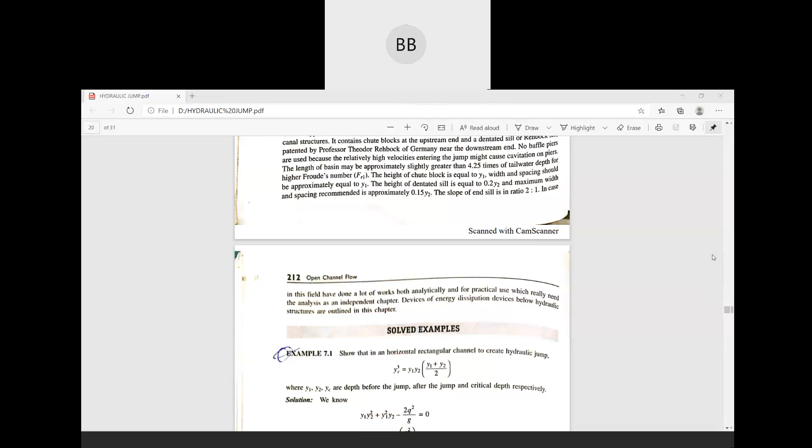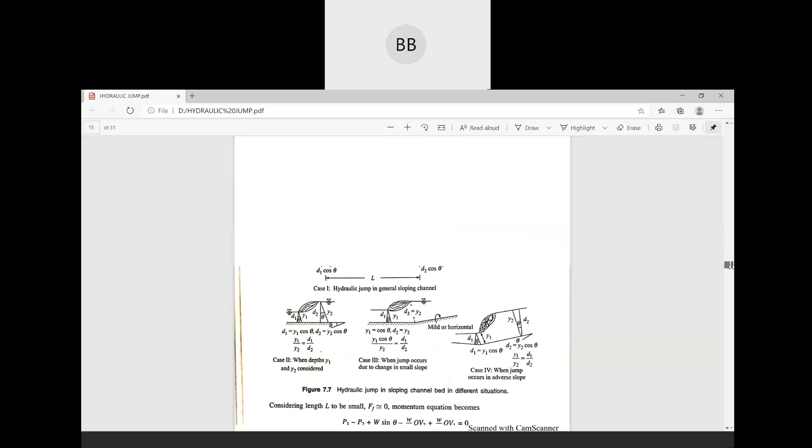I think in the last class we discussed types of jump, right? That is over. Then I think we also discussed losses of energy, and length of the jump.

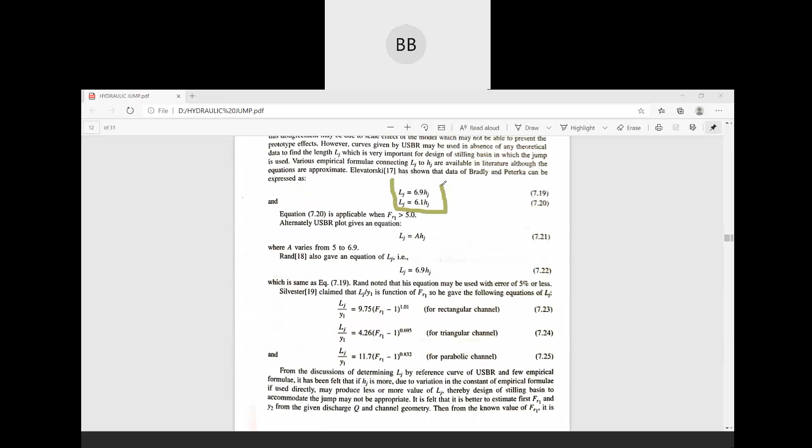We have two equations. When your Fr1 is greater than 5, your length of jump will be 6.1 times of hj, that is the height of the jump. And height of the jump is nothing but y2 minus y1.

If it is less than 5, then we will go for 6.9 hj, that is 6.9 times of the height of the jump.

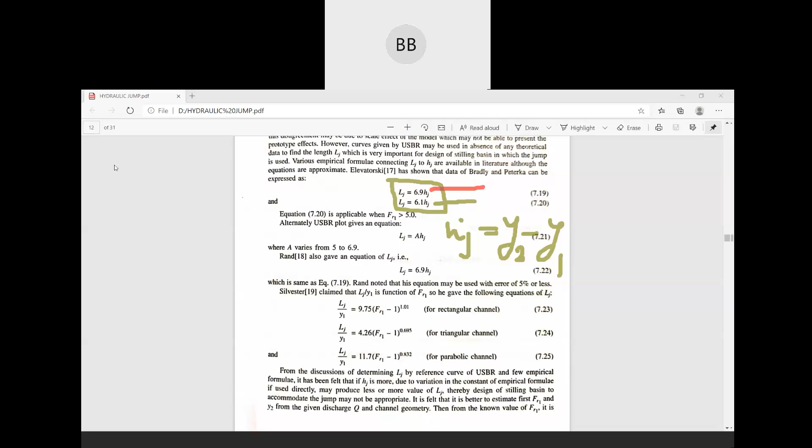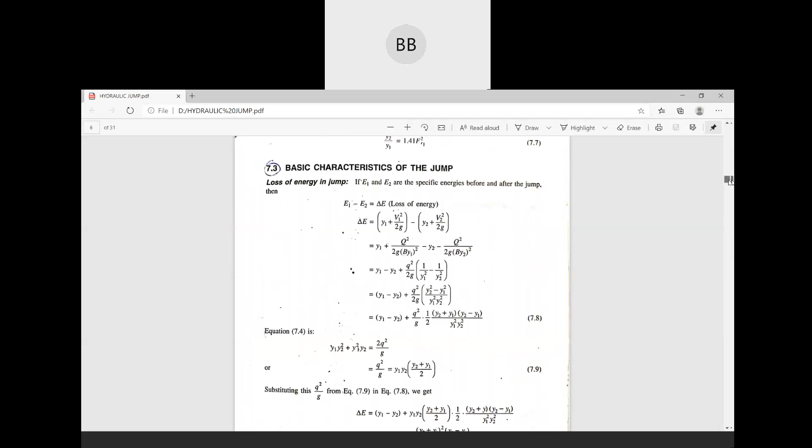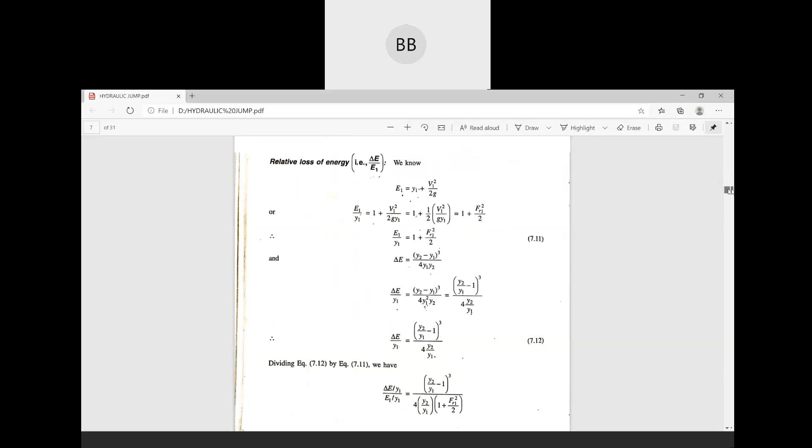Next, loss of energy, I think we have already discussed. This is the equation for loss of energy. I think we have already derived this expression, right? This is the loss of energy equation, that is nothing but y2 minus y1 whole cube divided by 4 y1 y2.

Then we have efficiency of the jump. Efficiency is nothing but E2 divided by E1. That is your efficiency of the jump.

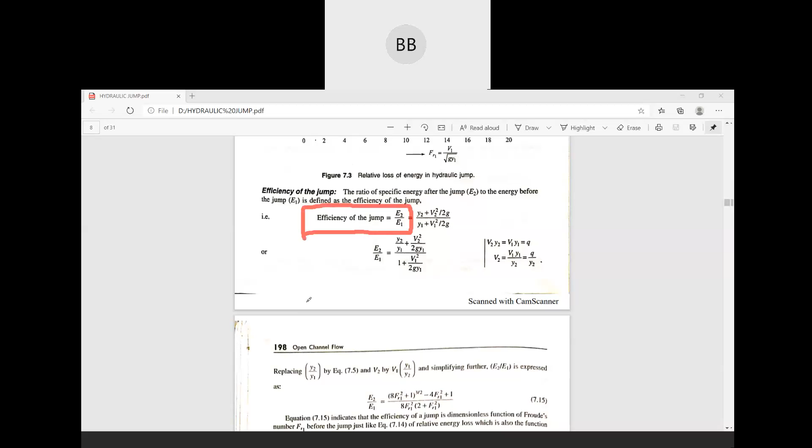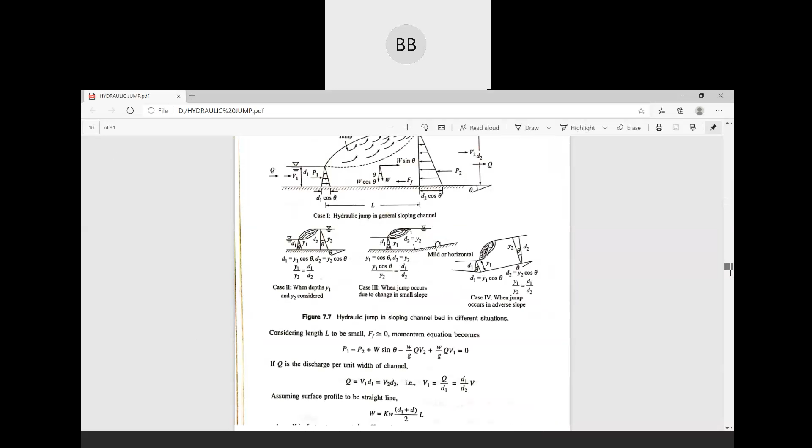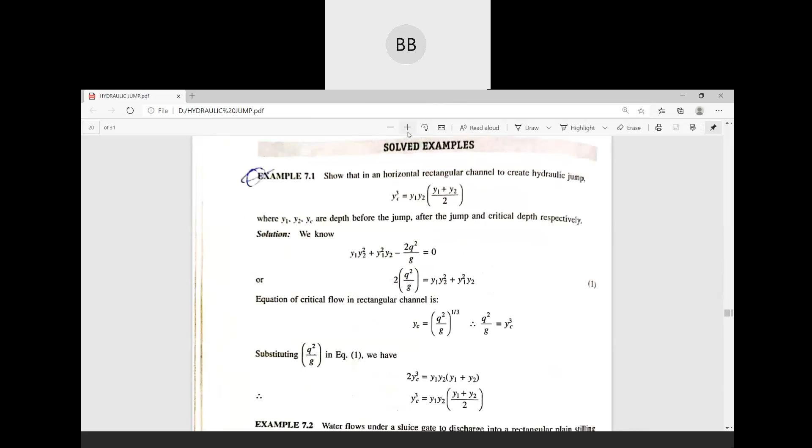Now we will move on to the numericals. So you write down this example 7.1.

We have to prove that for a horizontal rectangular channel to create a hydraulic jump, this satisfies yc cube is equal to y1 y2 multiplied by y1 plus y2 divided by 2. Here y1 is the depth of flow before the jump, y2 is the depth of flow after the jump, and yc we all know is the critical depth.

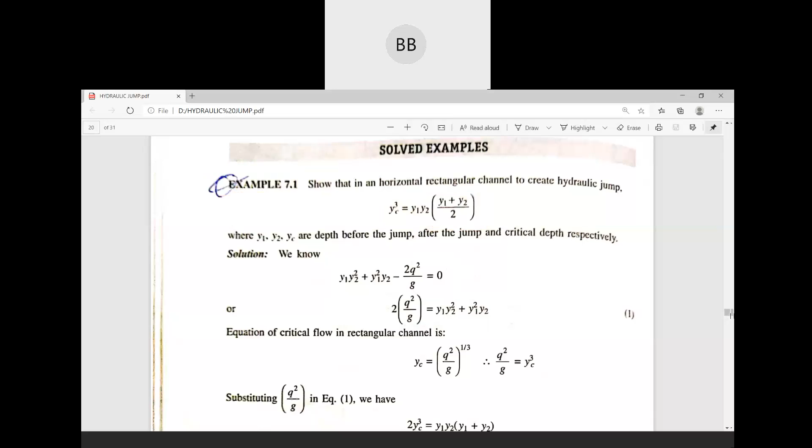So now to solve this kind of numerical, we have to use this equation. So now what is this equation? If you can, for this equation, you can go back. Just wait.

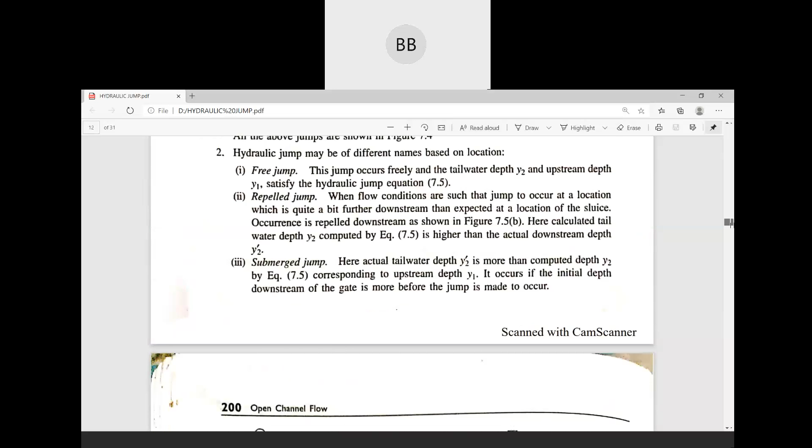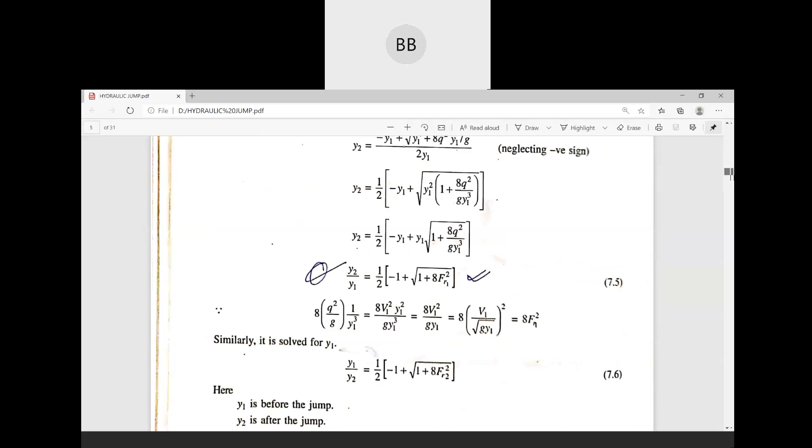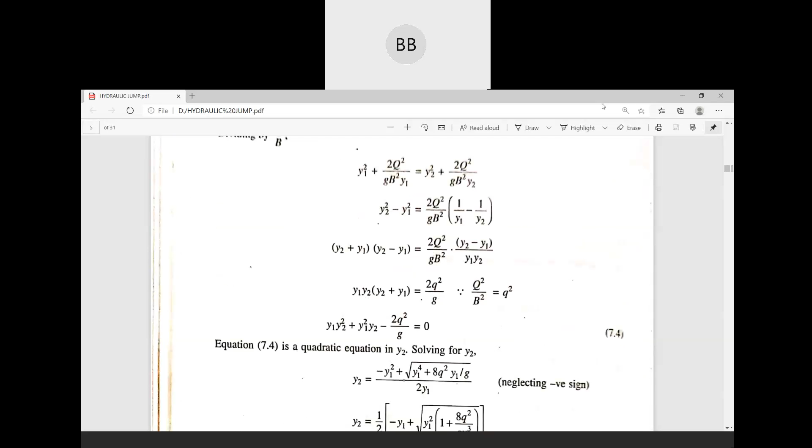So you can go back and see, for the derivation of our sequent depths, that is y1 and y2, we have already derived this expression. We are using this expression. Again for loss of energy also, in the derivation if you can see, we have used this expression.

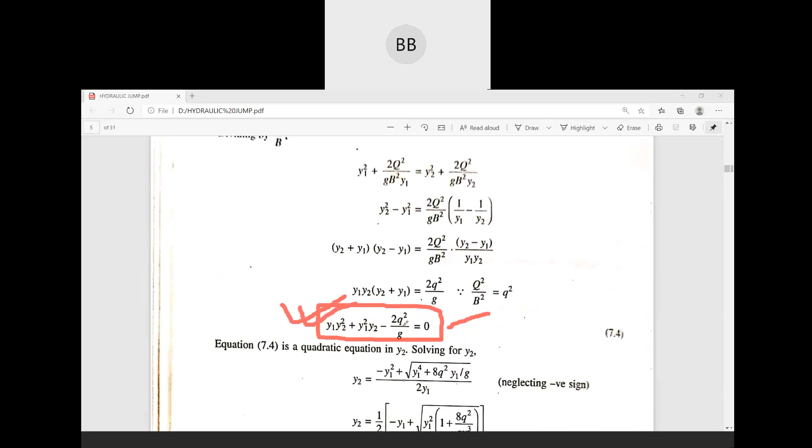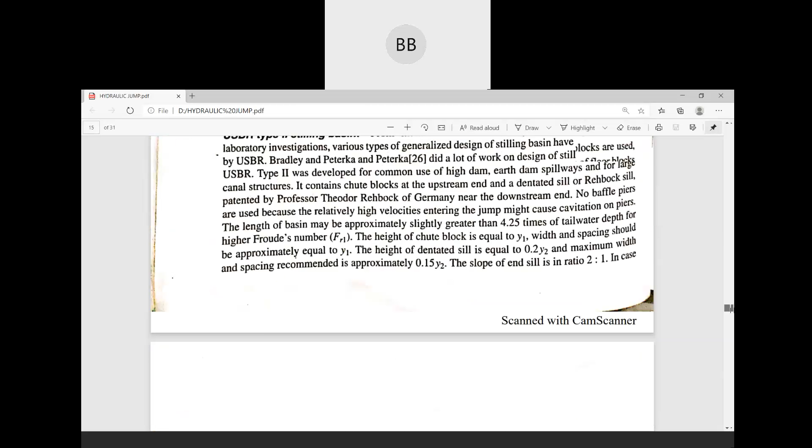And for solving that numerical also, we will use this expression. So the derivation is already here, we have already derived it. So we are going to directly use this expression in this numerical to show that yc cube is equal to y1 y2 multiplied by y1 plus y2 divided by 2.

So we use this expression. Then we bring this term in the left hand side, and the other term in the right hand side. Then we all know that the critical depth equation for a rectangular channel is small q square divided by g, to the power 1 by 3.

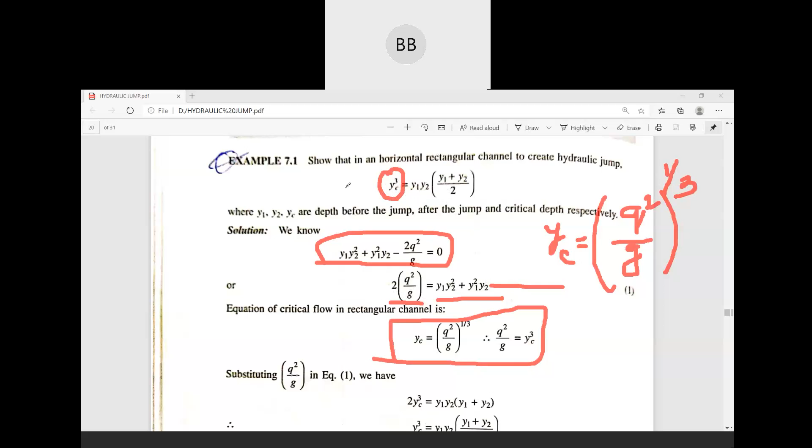Substituting this term here in this expression, q square is there. So in place of this we can write yc cube, because if you see in the question, we need yc cube. Apart from y1 and y2 in the right hand side, we should have the yc term also in this particular expression, because we have to show that our critical depth cube is nothing but y1 y2 multiplied by y1 plus y2 divided by 2.

So for this, we should have yc in that particular equation. To bring that yc, we know yc for a rectangular channel is q square by g to the power 1 by 3, or you can write yc cube is equal to q square by g. Here, in terms of q square by g, we will directly substitute yc cube in this expression.

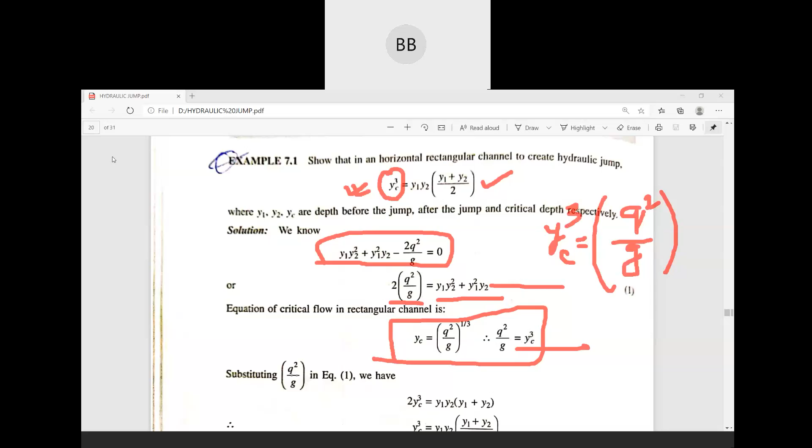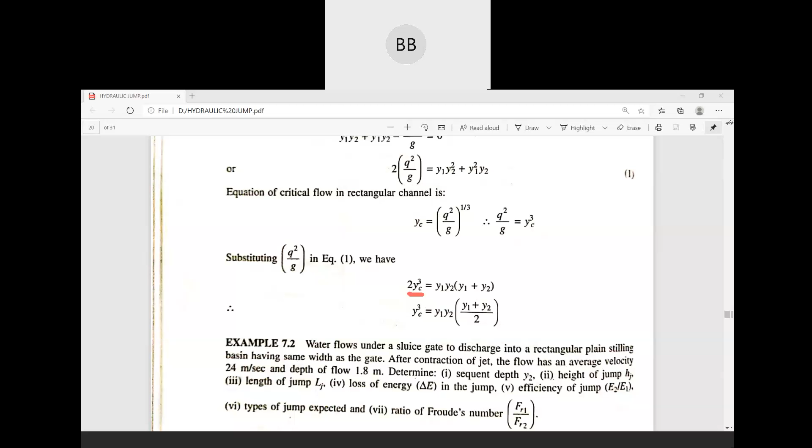And you can see that we have twice q square g there, we have substituted yc cube, is equal to, then we have multiplied. We have this thing here. You can see in this equation, this part, we have y1 and y2. So here also we have y1 and y2, so we have taken y1 and y2 common.

So the left out is here: y1 square is there, so we will be having y1, plus y2 square, so you'll be having y2. Then this 2, if you bring in here in the right hand side, it will be divided by 2. It's very simple, you only have to use this expression and bring yc in place of q square by g, since q square by g is nothing but yc whole cube.

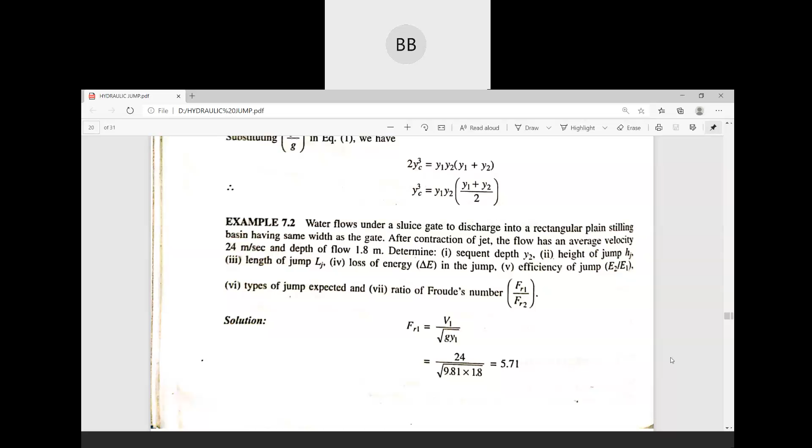So we will do the next numerical, that is our 7.2. So you kindly write down the numerical. Here it includes everything, so if we solve this numerical, it will be a little bit clear to you.

We are going to find out the y1 and y2 value. I think y1 is already given, we need to find y2 value, height of the jump, length of the jump, loss of energy, efficiency of the jump, types of jump also, and at the end we are going to find out the ratio. So first you kindly write down the question.